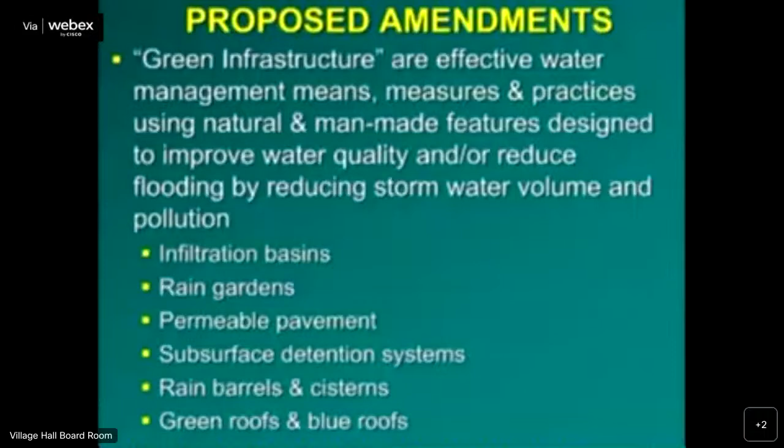And I'm going to quickly go through. There are probably 30-some specific amendments, and they fit into a series of categories: definitions, minimum parking stall size and number of stalls required for businesses. The changes are intended to allow the use of vegetated stormwater features in landscaping, and allow the use of permeable pavement under certain circumstances with village approval.

They modify our dumpster enclosure and screening design requirements to prevent contaminated runoff. It adds some language dealing with snow storage areas and identifying those on site plans so that they can be located in areas that won't result in contaminated runoff.

Modified shared parking allowance: we currently have an allowance in our code that allows for shared parking between different uses. The change here is a more definitive and more detailed requirement. If somebody wants to share parking, they have to go through an actual detailed analysis to show how that's going to work out. There's also a modification to our density bonus for additional landscaping using green infrastructure.

We can talk about that in detail, but the last two are things that frankly we've never used. Shared parking we've used once or twice since I've been here, and the density bonus for additional landscaping has never been used through our development code. So those things, while we're making some changes to make DNR happy, are things that ultimately we're going to have to probably change again to make them either usable or to take them out altogether.

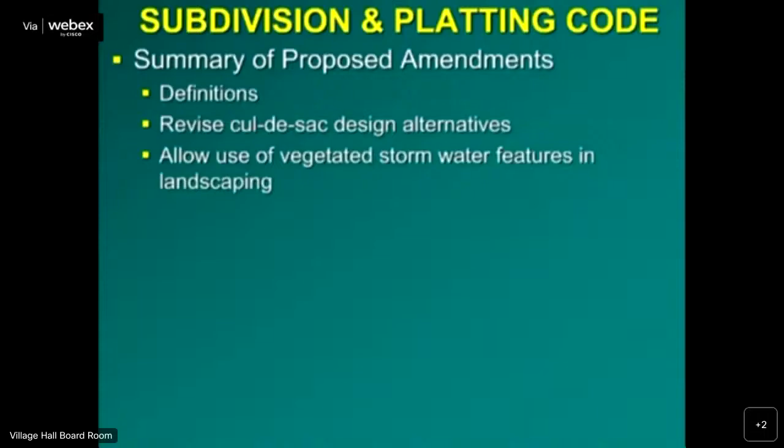So with that, I'll respond to any questions you have before we go to public hearing. Commissioners, any questions? Let's start with Mr. Machewski.

On the parking spaces, so we're going to 90% from what we're at today, I think it's 180, right? Take off 18, maybe it's 162 square feet, which is 10% less. Couldn't we look a little harder at the code or what we're requiring? For larger distribution facilities we require a couple hundred spaces, but you've got 18 people working there. Couldn't we look more at the use of the property? Retail is a good example, there's probably fewer people running in and out of some retail locations. Rather than just making a blanket rule to make spaces smaller, it seems vehicles aren't getting smaller, maybe larger over the last 10 years, and there's a public cost for that, dinged doors, angry people. It seems like a poor way to manage the problem by just making all parking spaces 10% smaller.

I agree with you, but there are a couple other things working that we should discuss along those same lines. As you may recall, the parking standards in our zoning code are specifically stated as guidelines, and we allow businesses to come to us as part of their proposals and say, I don't need 600 stalls, I only need 200 because I have 3 shifts of employees and a total of 150 employees, which is exactly the issue you raise. In fact, we have a project on our agenda tonight where that exact scenario applies.

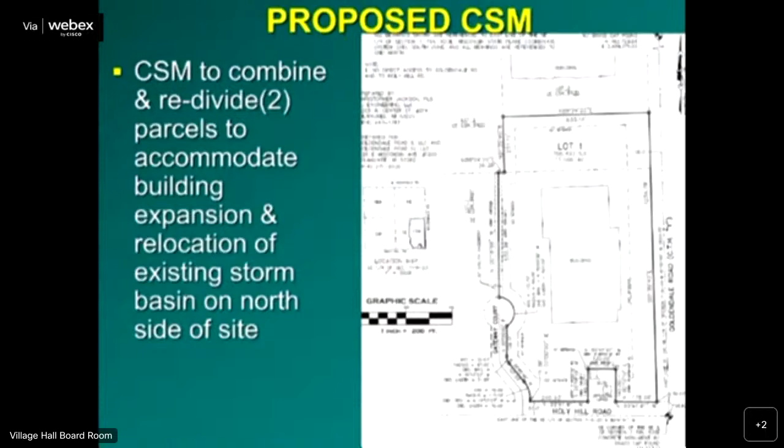The proposal requires a certified survey map and site development and building plan approval. The CSM is needed to combine two parcels and redivide them to accommodate the building expansion on the north side of the existing facility, and to accommodate relocation of a portion of an existing stormwater basin. There's no change to access.

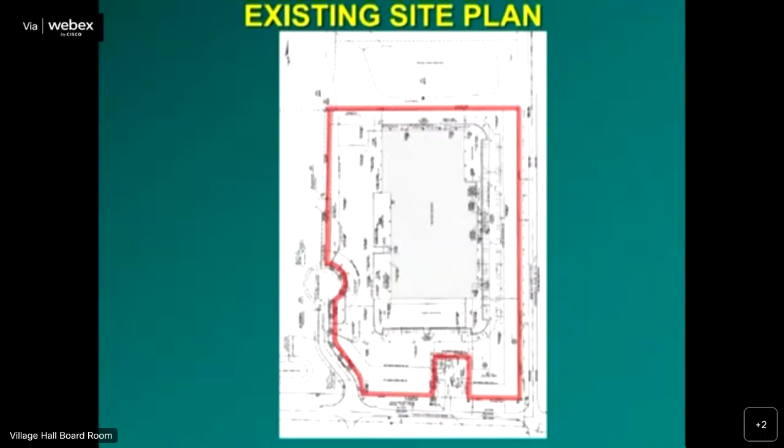Access will continue to be from Gateway Court, two different driveway locations. For stormwater management, additional roof drains and on-site storm sewer will relocate to convey runoff to two basins: a relocated basin at the northwest corner, and an existing basin at the southwest corner currently serving the dielectric development. Landscaping will include a continuation of foundation plantings on the east elevation, continuation of the undulating berm along Goldendale Road and street trees, and additional lighting on the building addition on the south, west, and north.

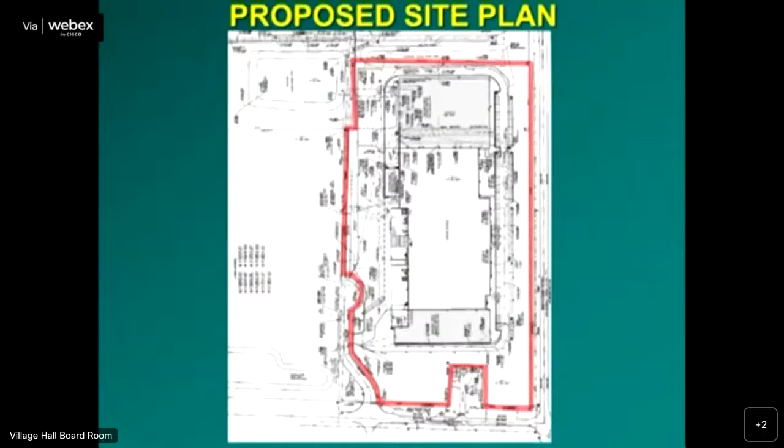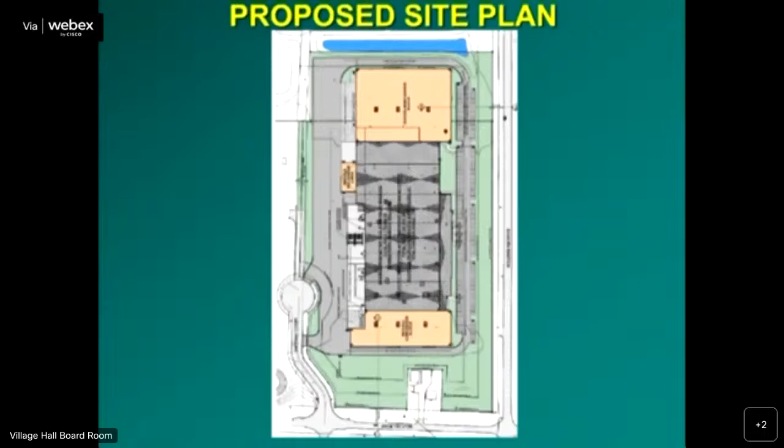There'll be a small portion of stormwater basin that will be reconstructed north of the existing basin, on what would be the south side of the Dickman 2 building property. All of those, that basin serves all of those properties and will continue to do so. It just will be split into two different locations on the north side.

And then again, additional runoff will be conveyed to what's now the dielectric basin along Freistadt, along Holy Hill Road. That basin has been sized to accommodate runoff from this particular site because of the topography. So the stormwater management is okay in this area, and while there's some outstanding items, technical corrections being looked for from the engineer, they have no problem with what's proposed.

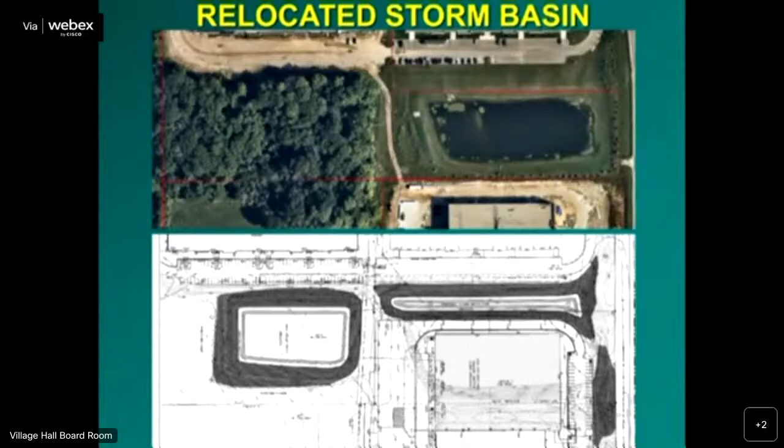The building improvements themselves, again, 3 separate building additions totaling 129,000 square feet. The additional space being added is for manufacturing, production, and warehouse space. There's no increase in employees associated directly with this particular expansion.

And so the parking stall count, while it does change minimally, I think there's 2 additional stalls that are proposed. It's mostly relocating parking from what was on the south side of the building to the east side of the building, just adjacent to the north building expansion.

Same precast insulated concrete wall panels and insulated metal panels on the west elevation. The same 3-tone color scheme and reveals will be repeated. Roof mounted mechanicals will be hid behind parapet walls.

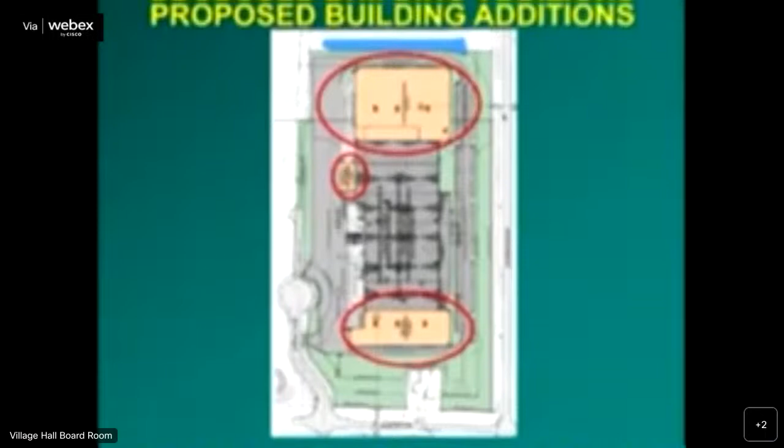There are some graphics in the application that show the vision from the public streets and those mechanicals hidden behind the parapet walls. Aluminum storefront window systems, again, continuation from the existing to match. Additional loading docks on the west side of the north building addition are also proposed.

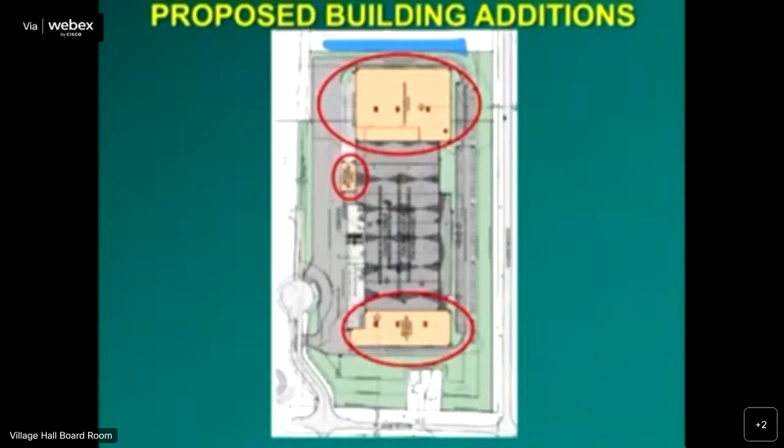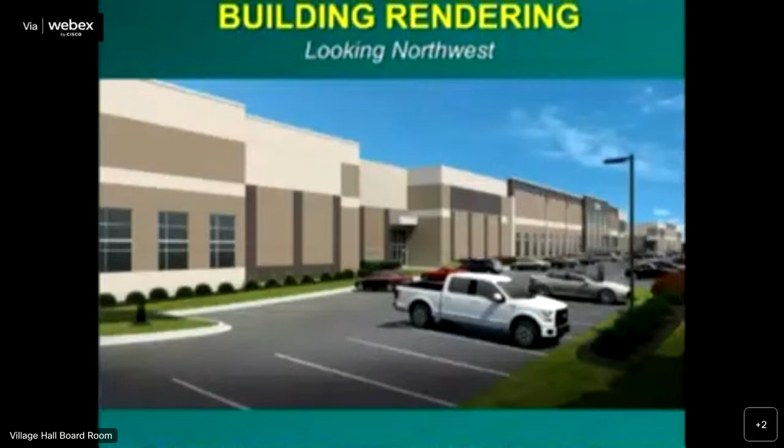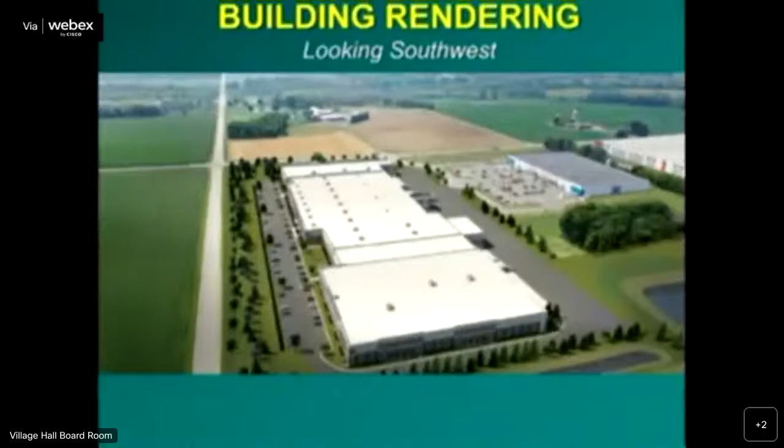And looking southwest from essentially the Rockfield at Goldendale Road - I'm sorry, south of Rockfield Road, but on Goldendale Road, looking southwest across the property.

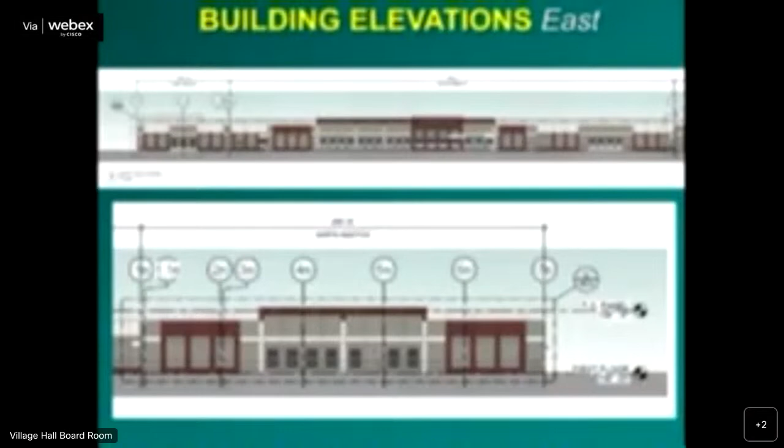Building elevations, again, architecture, materials, reveals, all to match the existing building. And if need be, we can look at those in more detail.

Staff comments: minimal additional parking is proposed, but given the expansion for production and warehouse with no increase in employees, that is not necessarily a problem. As indicated in the staff report, I believe approximately 600 parking stalls are called for under our guidelines. 170 are proposed, 162 are currently provided on the site.

One issue of concern: the proposed lighting on the south building addition is shown at a mounted height of 22 feet. This was a significant issue raised when the original building was approved, with a former Plan Commission member. Ultimately, the Plan Commission required that fixtures mounted on the building on the south elevation be mounted at a height not to exceed 14 feet. So, assuming the Plan Commission would approve this with a similar condition, that would have to change.

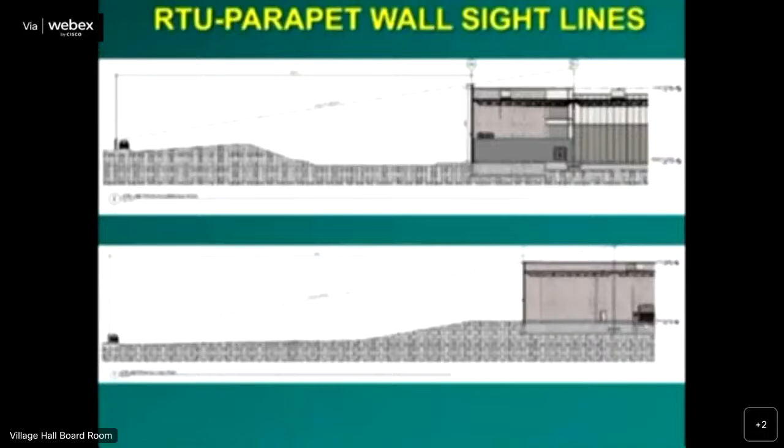Village engineer comments: there's a technical memo dated June 26th with some minor issues and plan corrections called out. We received revised plans today that address those items. Those will need to be reviewed and approved, and that is a condition of approval.

Similarly, the village surveyor had some minor corrections to the CSM. We did receive revised CSM pages with those changes. Those will need to be reviewed and approved.

Finally, wastewater utility had some comments. Sanitary sewer connection fees and a new wastewater discharge notice of intent will be required as part of the expansion, and are required prior to issuance of building permits.

The staff recommendation is to approve the site development and building plans for the proposed expansion, subject to 8 conditions, and also recommending approval of the proposed certified survey map, subject to 1 condition.

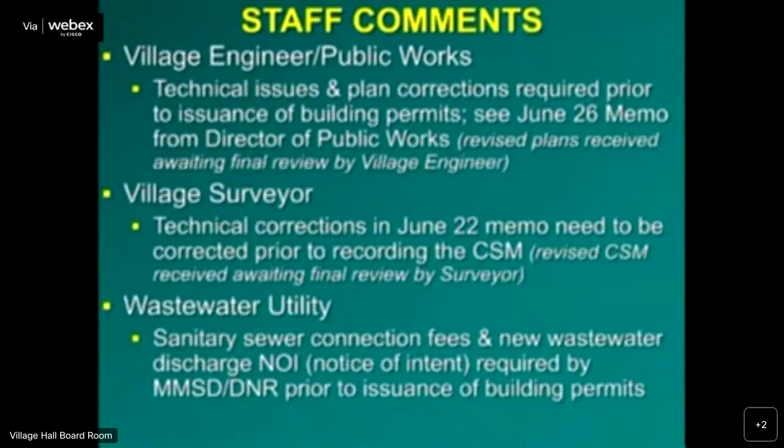We do have members of Briohn Building Corporation. I believe Caitlin LaJoy is here to respond or have any comments, or anyone else representing Bryan Building, Golden Road, or Golden Pet.

Hi, thank you. Caitlin LaJoy, Bryan Building. I am here to answer any questions along with our project engineer and civil engineer.

Commission members, any questions for Ms. LaJoy at this time? I didn't understand the part about the lighting, when that came through a long time ago. Is there anything we need to do about that tonight? You would make a motion to follow the original submittal to lower the lights to 14 feet, which would be an additional condition, a 9th condition. It's already number 6 in there. You don't have to do anything because it's already in there.

Commissioners, we have a motion to get it on the table for discussion. I'll move approval with the requirements laid out in our package, 8 conditions. We have a motion, do I hear a second? A second - that's just for the first 8 items, not the certified survey. Correct. We have a motion and a second.

Discussion. Mr. Leszewski: not to belabor the lights, but they were approved originally at 14, but they ended up at 22. They were originally proposed at 22 and the Plan Commission required them to be lowered to 14 feet. So they are at 14 now and they'll remain at 14 if this is approved that way. Correct.

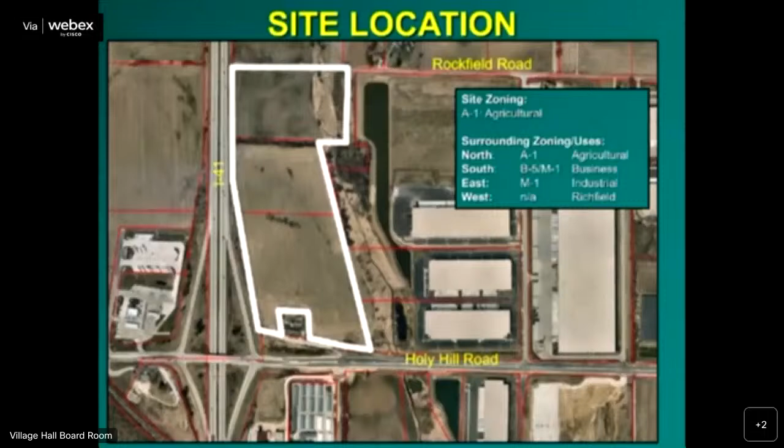Hi, Joe Jersenis with Briohn Building Corporation. As Jeff mentioned, we're here today to discuss the proposed development for our client Green Bay Packaging, Great Lakes Division. Here today is Dave Malley and Steve Wolf from Green Bay Packaging.

The Great Lakes Division of Green Bay Packaging currently operates out of 4 separate buildings on Carnegie Drive in Germantown. Their current operations are limited due to the inefficiencies of operating out of multiple facilities and having the ability to expand on their existing footprint. They're landlocked and they're trucking stuff back and forth on a daily basis and just need to figure something out. So this proposed development's necessary to allow the organization to consolidate their operations into one facility.

It's desirable for Green Bay Packaging to stay within Germantown. They like it here, they want to stay here. However, there's a lack of available industrial land and there's immediate need for them to develop a new facility. So they're prepared to relocate to a neighboring municipality if something's not able to work out on this site.

I'm going to walk you through the proposed development plan that we have, and then Dave Malley's going to come up and talk about what their current operations are and what they'll be operating out of this facility. But the ask today out of the board members is to just see if you guys are willing to support this use on this site.

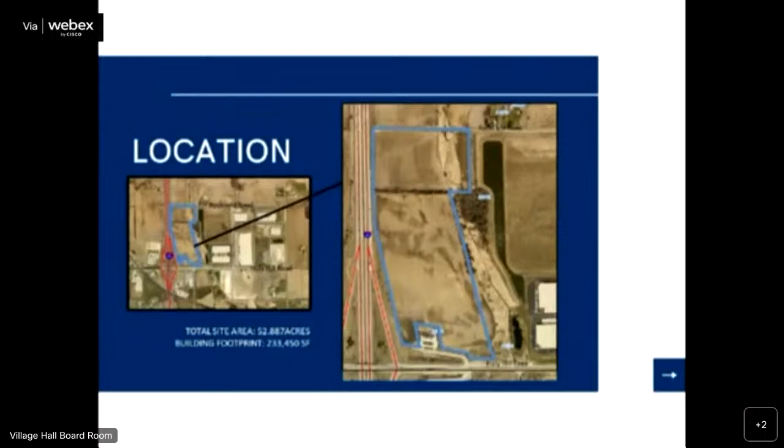So if we switch over, Jeff mentioned the 52-acre site that we're talking about. Southern property is Holy Hill Road. The northern property line is going to be Rockfield Road. To the west is Highway 41, and to the east is all the other adjacent industrial property.

In summary with this project, we're looking to rezone it from A1 to M1, create a new CSM combining the parcels as needed, and then work with Germantown to construct a public road connecting Holy Hill to Rockfield. And then we'll be constructing approximately a 233,000 square foot building as the first phase of this development.

So the site plan that we're looking to talk about is coming off of Holy Hill Road, looping all the way on the west side of the property, north, and connecting up to Rockfield Road. We're also taking considerations on how to redo access to the gas station that hasn't been designed or put in place yet, but it will be part of the master plan of that development.

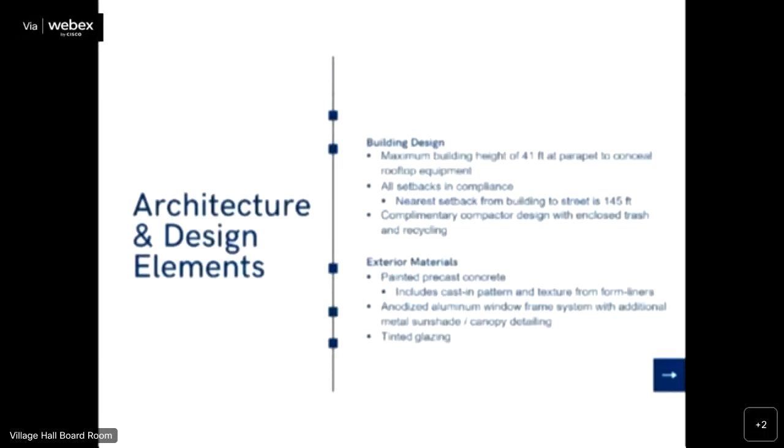Now, our architectural designs, which again are conceptual, fit Green Bay's requirements and we feel fit yours as well. We're going to be looking at a max building height of about 41 feet. We'll be in compliance with all the setback requirements. The building itself is going to be painted precast concrete. We'll have cast-in patterns and form textures associated with it, aluminum tinted windows, metal sunshades, and building canopies as needed. So the plan is to give a headquarters feel, not just more of a traditional inline industrial look.

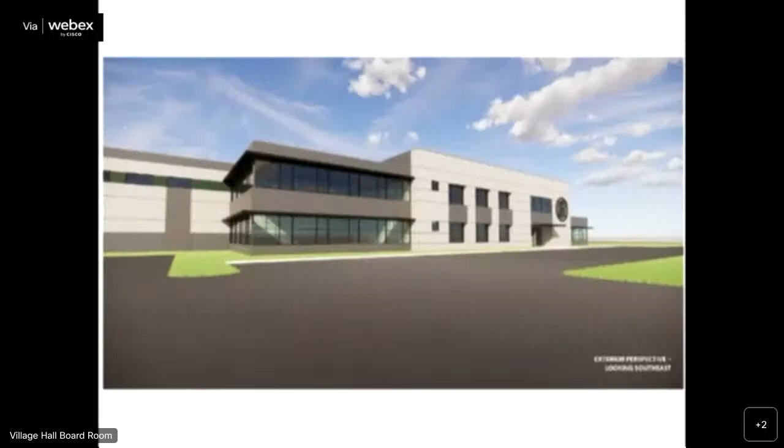The next site we're looking at is southeast, and it's looking at the main office entrance from the other side. So the other view is coming in from this way. This is the other office where it's two-story offices coming up. And then this final rendering, this is just the southeast corner, so looking from the north-south of what the full building would look like.

So this development's a great opportunity, and it's an opportunity to keep a local manufacturing company that has deep employment history in this village. Their proposed use is a natural extension of the adjacent industrial buildings that are there right now, and it's comparable to the planned developments that are going to be happening right across the street to the freeway. So Richfield already has a master industrial plan there that's going to be high density. This is actually going to complement that, you guys are not having a high dense industrial building here or multi-industrial complex.

So we've done a lot of projects in Germantown, as Briohn Building, and we understand the quality you guys are going to look for out of this building. And I'm confident we'll be able to get there if we work together. But our task today is not to get complete sign off, we're just looking to see if you guys are willing to approve this use.

So I'm going to bring Dave Malley up here and he can talk about what the operations are in their current buildings. And then I'll be up here to answer questions as well, unless you guys want to jump into questions on the proposed development before you hear about the operations. So let's hear from Dave first, and then we'll get into our discussions. Sounds good.

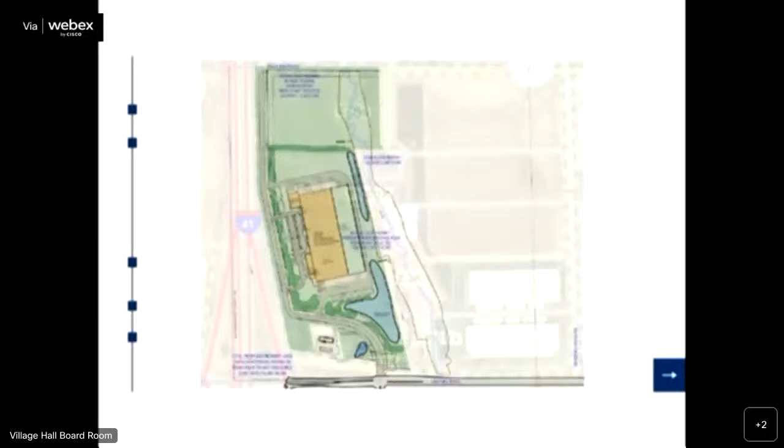What's nice about this particular property is that environmental corridor. Go back here to the site plan. You can see it here—there's a navigable waterway that lies east of this proposed development and west of the Zilber development, the Germantown Corporate Gateway Corporate Park. A nice buffer that's reflected in our 2050 plan, the vision, within which the thought was that we would continue the trail system that was starting.

The mixed commercial, high-density residential is a concept at this point. We don't have the zoning districts. We don't have the master plan done that would support that type of development. With that said, this is the plan that we currently have.

The question is, do we abandon this approach at this point without seeing the benefit of our master planning effort, and buy into the idea that we should continue the existing corporate office and light industrial development all the way to 41 in this particular location, or do we hold out and wait for that process to play out and see where we end up? That's what we need to discuss.

Okay, and that's really the direction. Now, with that said, if it's clear the Planning Commission wants to pursue this, then we need to start talking about some of the finer points.

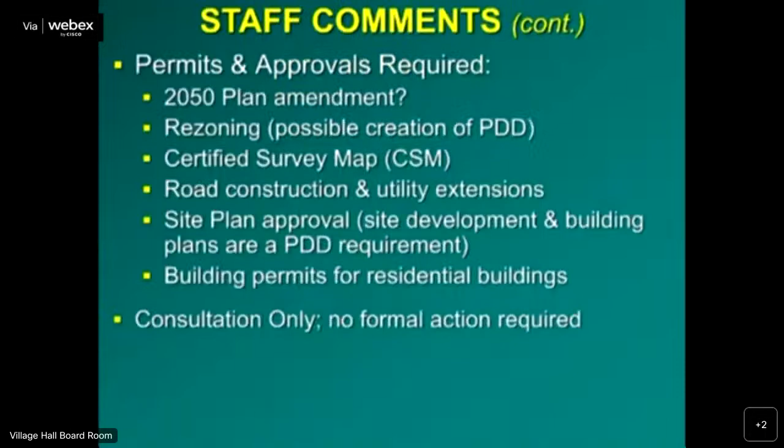But then there's the issue of—going backwards here—building location, the orientation, what uses would be put to the other development parcels that were shown, the building architecture, materials, landscaping, the typical site and development issues and features. So with that, I'll just sit back and let you guys jump in.

Let me ask a couple of kickoff questions. Is this going to be part of the TIF, or is this outside of a TIF? It's outside of the TIF currently, but that doesn't preclude TIF dollars from being spent on improvements. You can spend money from a TIF within a half or quarter mile of the perimeter—in this case, the frontage road location, regardless of where it is within that.

Okay, but once this is built, it's 100% on the tax roll? It's not in the TIF district and it's not partially on the tax roll? At this point, that would be true, yes. I don't know where this ultimately leads as far as TIF districting.

Melanie, I'm asking. Yes.

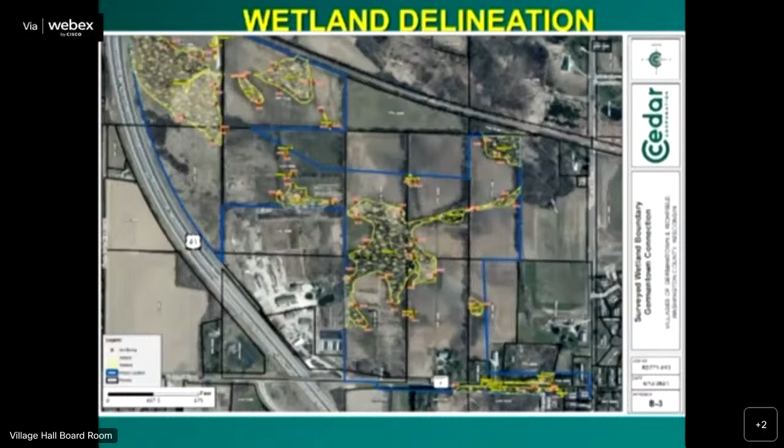And so the next graphic shows the refinement of the routes recommended by staff through the Freistadt district for both water and sewer using the red boundary. The blue on there is the area within which the wetlands were delineated. So you can sort of ignore that blue line, it doesn't pertain to the utility extension route at all.

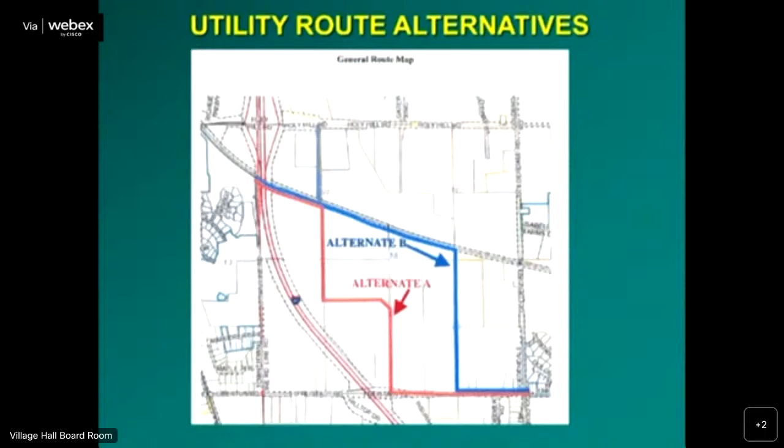The solid red line is the route recommended by staff. And if you compare that to the original plan, it's basically a combination of the two, sort of effectively right down the middle in some ways of the original routes that were being analyzed. They're to be located in an orientation and location to avoid environmental impacts to the extent possible.

On this graphic, we're showing the ultimate potential right-of-way, assuming the route would include a combination of future road right-of-way as well as the utility area, which varies between 100 and 120 feet in width, centered on that red line.

As we get into negotiations with the property owners, the location may change, but the idea is to locate the route and right-of-way on as few property owners' land as possible, narrowing the number of owners to negotiate with. That may be possible by slightly moving the red line further east of a section line or further north of what's shown here. Those refinements will be worked out during engineering planning and property acquisition negotiations.

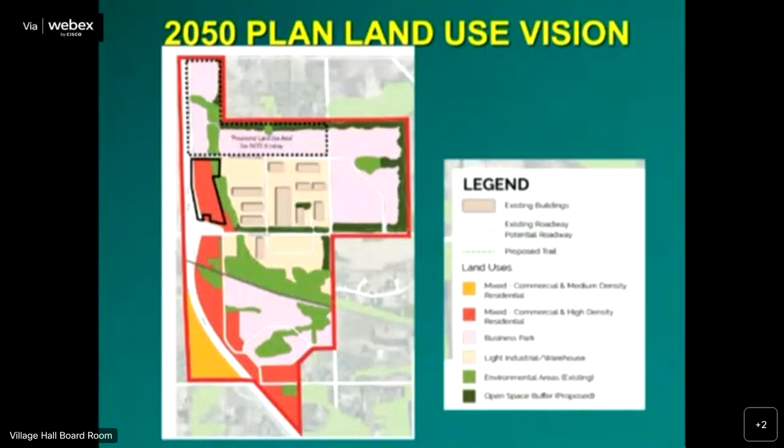So I think the thought is that moving forward, whatever right-of-way is acquired through the Freistadt district for the utility extension, that it be sufficient to also accommodate not just future road, but also recreational trail or at least sidewalk.

And is it preferred to be straight cuts like this, or would a sweeping curving work? It doesn't matter from the standpoint of the utilities themselves. It can be 90-degree angles. This is sort of a generalized representation, but yes, there's really no necessary impact associated with the utilities as far as the angles.

Right, what's going through my head is I'm thinking of the master plan—is there a better road system than down, over and down to get better lots?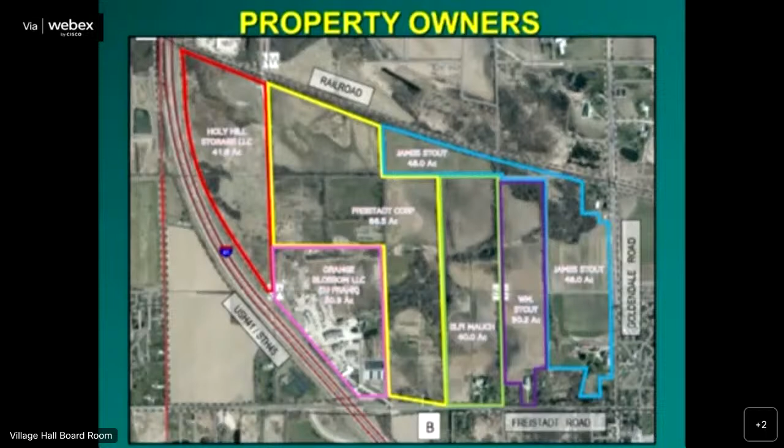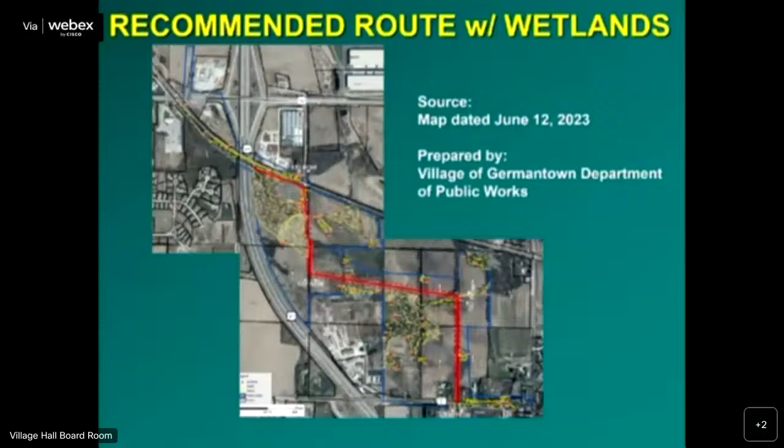Again, what we're looking for is a plan commission recommendation to the village board concerning the route. We have a motion to approve. Do you make the motion? I made the motion. Second the motion to approve as presented.

Any further discussion? Personally, I can see a variety of ways to go, working with the wetlands so that there's opportunities here to get lots in here. Yeah, and we went through a lot of iterations.

And of course, we're still subject to negotiations with the property owners as well. The big question mark is right in the middle—it's the DJ Frank property. They made it clear to us that they want to continue operating as they have been for as long as they can. And frankly, we approached the utility route with that in mind.

Okay, any further comment? Do you have enough input from us? We need to take action on that. Okay, so we have a motion, we have a second. Any further discussion? Does everybody remember the motion? To approve as presented—recommend as presented.

All in favor? Aye. Opposed? Motion carries unanimously.

That will bring us to item F, University of Wisconsin Department of Planning and Landscape Architecture 2023-24 Senior Capstone Project Request for Proposal, Community Design and Planning Services, Discussion and Action.